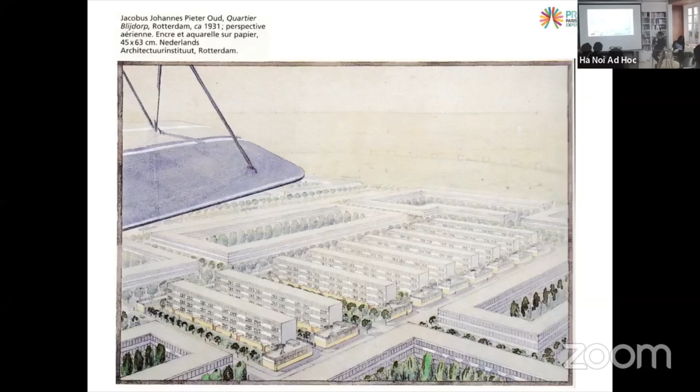I just have two slides to speak about two projects in the 1930s. This one in Paris, in the suburb of Paris, in Drancy, and this one in the Netherlands by J.J.P. Oud, a famous architect in the Netherlands in the beginning of the 20th century. And why these two pictures? Because we can clearly see that these two projects are not the very first ones, but they're very important for mass housing. This one in Paris is the very first one, with Marcel Lods and Eugène Beaudouin, who created this social housing.

But what is interesting is this, and then this. It's also related to modernity. It's not just to make something fun in the picture, but it's because at that time, in 1930, the aircraft is really the symbol of modernity - speed, dynamic, new technology, something very new. So it's not just a picture to present a project, it's not very far from propaganda, showing something in this project.

The next picture is also because the context - the political, cultural, and economic background of mass housing production - is, as I said at the beginning, most of the time because of a housing crisis. Here is a picture of Paris, but it's very true for all French cities, and I think German cities too, that after World War II there was a huge housing crisis. You see this is a very well-known slum in Nanterre, in Saint-Ouen, in the first belt around Paris. So this is what motivated the authorities to think about a mass housing construction program.

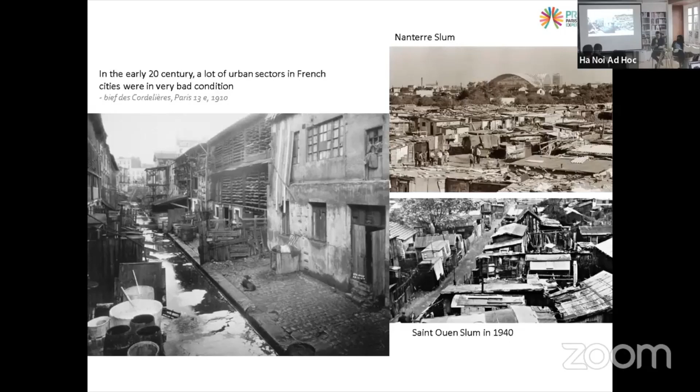And also what's happened right after World War II, it's what we say in France, Trente Glorieuses, 30 years of very high economic development, 1950 to 1970, where there is this kind of program of mass housing construction taking place, because it was also a way to modernize the society.

So here we don't speak about housing, but living. And in fact, it's what people dream at that time: have a car, traveling, have electronic equipment in the house, something like that, to have a modern life. See this advertisement, Moulinex libère la femme - free the woman. So it was really important.

I have a movie, but we don't have time to watch the movie.

And in parallel with this situation, there is also some concepts, a new concept to organize the city. So this one is a bit older, but those concepts was just a theory or a utopia when they thought about this in 1898, for example. After World War II, they became real, they became like an inspiration to develop this kind of program.

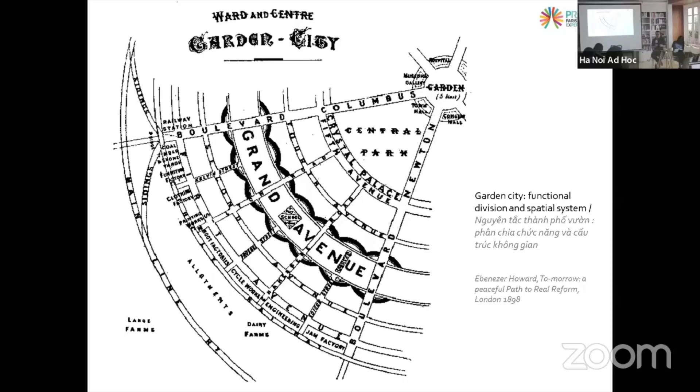What was also very interesting and also fits very well with the Vietnamese example is the company town. And I take this example because I want you to understand that the massive influence from foreign countries is not only from socialism. This kind of reflection, this kind of concept was also developed in other kinds of capitalist countries like Britain or here in the States. So, it's quite old also, 1890.

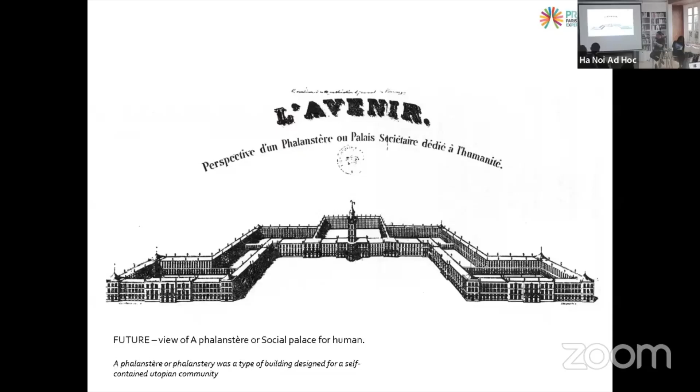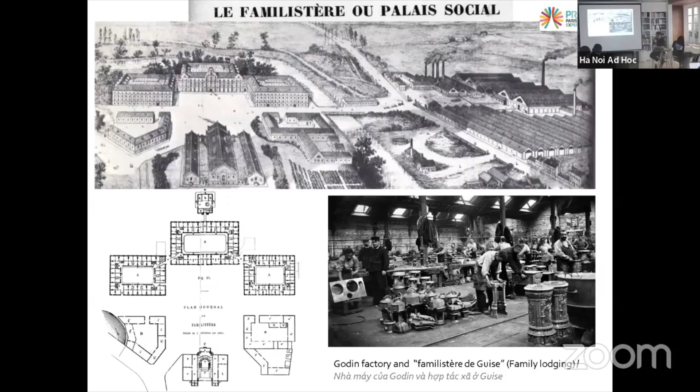And think about - so we see the picture, it's very similar to this utopic picture - think about welcoming all these workers in the same place. There is just a river in between the factory and the housing project. And this is also a very important reflection about how to dwell, how to live together.

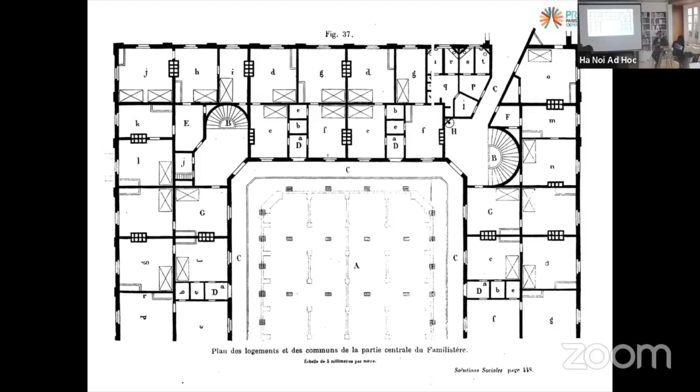So, for example, this is the common courtyard for all the people who live there. And this courtyard was really supporting all the community activities, etc. And it was very true also for all the ground floor. So it means that they shared in this building some nursery, some kitchen, some toilets, bathroom, etc. So it's why it's the very beginning of collective housing.

So here we have some archive pictures of this courtyard with people who live there in the middle, and it's very supportive for community stability and community events, like this one, which could be an official ceremony for a wedding or something linked with national fair activities. So this is a very interesting project because it's one project that really started to think about collective society and living together in one area. This is actually a today picture of this Familistère. Now it still exists, but it became not a housing building anymore, much more a museum.

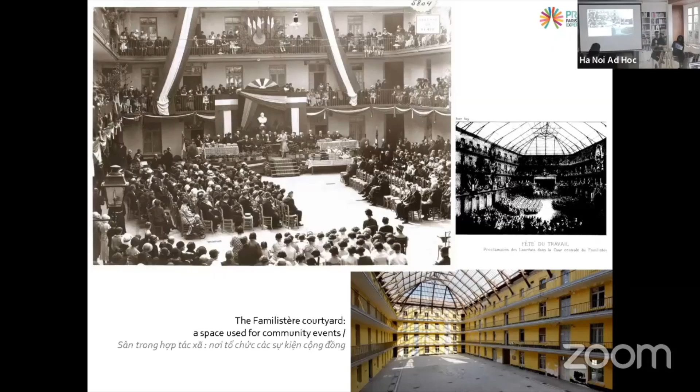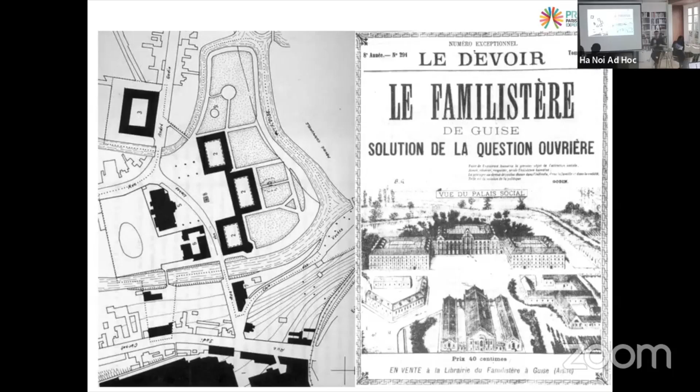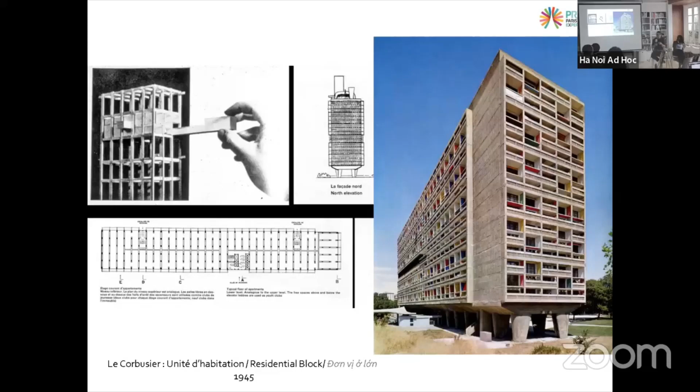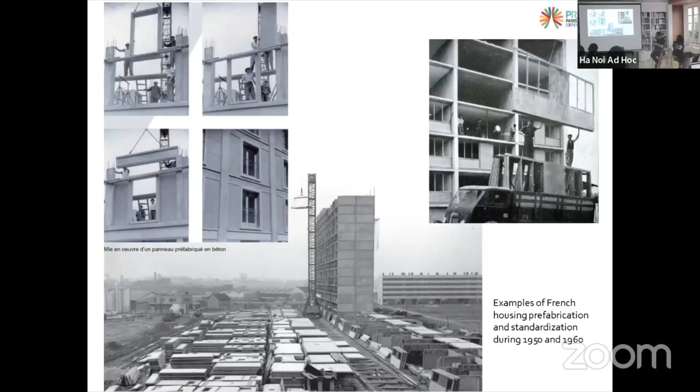So what happened after in Europe? What's important is that after World War II, when there was massive destruction in some cities, they needed to rebuild and make mass housing program construction. So it's the time they started standardization and precast construction for housing, and you have some examples here, also in the suburbs of Paris. You see the small row houses traditionally built for workers, and the new model, where we can see the precast concrete panel construction.

And there's something quite interesting also: they industrialized the construction process, using the crane track. This means that the size of the building is not limited, but is limited by the crane track, which can allow it to be very, very long.

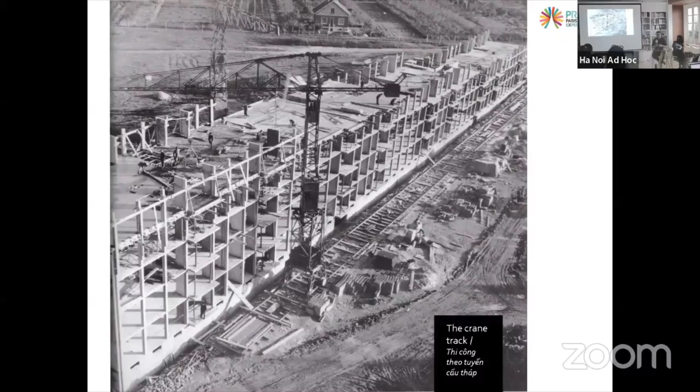You can see, for example, this one in Nancy, France, in a neighborhood called Le Haut-du-Lièvre. At that time, it was the longest building in Europe. And you see that it's not only one building, but several buildings, with a lot of heavy housing and people living there. It was just after World War II.

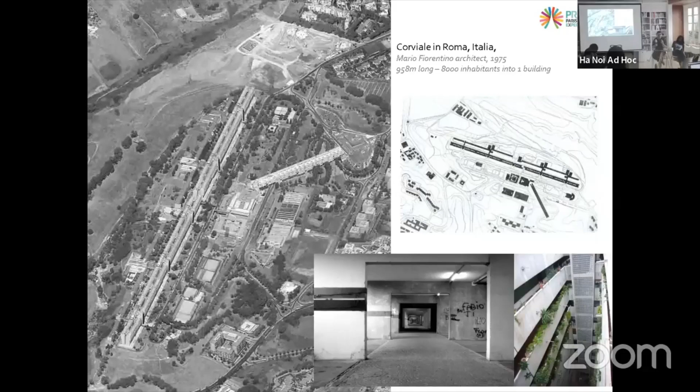And here's another example, a bit younger, from 1975, where the crane track construction method is also very visible. This is the Corviale in Rome, Italy, almost one kilometer long. So these are some experiences in Europe.

There is also some... it's true that in Europe, for example with Le Corbusier, and other mass housing, it was most of the time promoted by socialist governments. But once again, it's not only a socialist view or idea for people. Here's an example in Asia, in Hong Kong. Hong Kong has almost the same cultural background, not the same political background for sure, not the same historical background as Hanoi, but still it's interesting to see that in Hong Kong, after December '53, there was a huge fire in the neighborhood. And then...

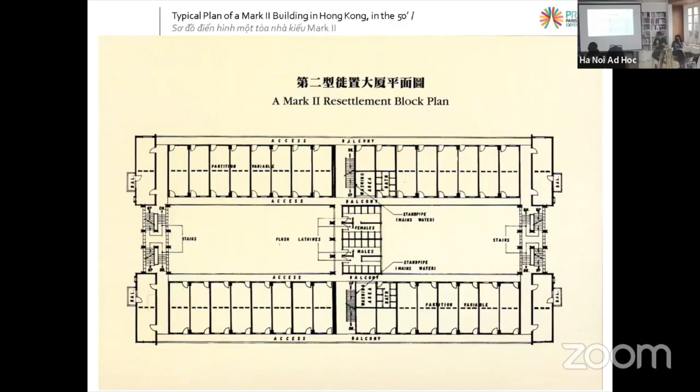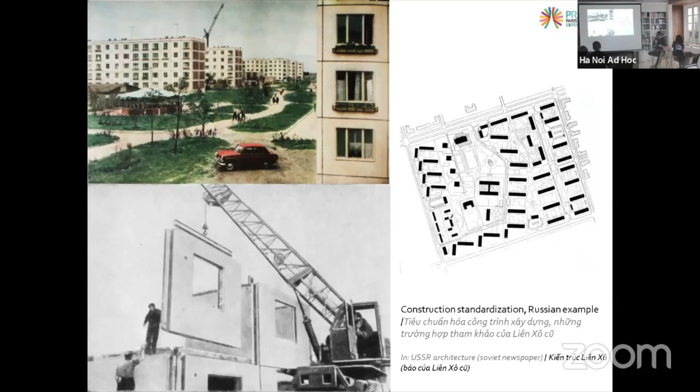Interesting. We see the same technical construction that there is also in France after World War II. The same kind of picture. So it was something very normal at that time to think about precast, prefabrication, etc., concrete precast, etc.

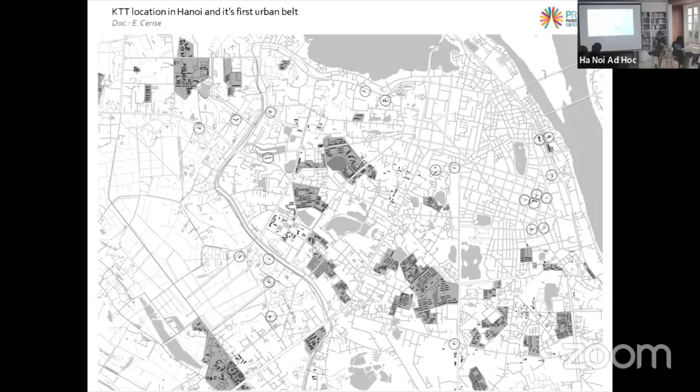So it means that it was also a location to modernize the city. It means that at that time they didn't really care about preserving the heritage city or heritage architecture. This first belt of urbanization was the place to make experimentation, to make a new kind of city, urban living. And it's also what we can see in the propaganda poster at that time.

Here is... you can understand, I'm not sure about the translation, but it is something like build something new, beautiful. And what is interesting in this poster is that there is a crane everywhere, a nice woman who drives the crane. Some industrialization and industrial sites, but this building in the front looks like housing. So it means that housing is also a part of the modernization of Vietnamese society at that time.

So this is another poster, and what is interesting is also what we can see here. We recognize the real socialist parts, but here what is interesting is we can find the crane and the precast concrete elements to build houses. So it means that it's quite an important part of the socialist propaganda.

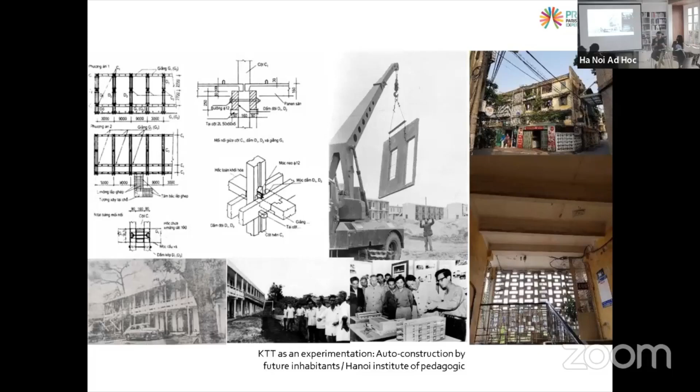And here on those drawings, you can clearly see also in this document, for example, the precast concrete element that is put together to make the building.

So this is some map of the floor. And what is interesting, as I showed for some other socialist country, they start also to use some type or model. So there is different kind of model, TL71 for example, or this one. This one is very interesting because TL means that sometimes the unit is the L shape or T shape, 71 is the year. So they build thousands of units using the design model. So it's really the technical standardization and in fact also the architectural standardization.

And here is also interesting on this model, the TL71. In fact, there is one corridor, the staircase here, one corridor, and two rooms, and a technical part here where there is the kitchen and bathroom. But the two rooms was also divided to allow two families. So it's also really a collective unit.

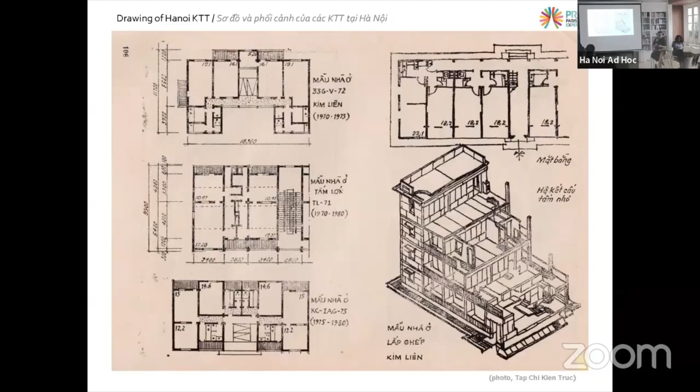And here is one of the first experiences in Hanoi, started in 1958 in Kim Lien, that we will visit later I think. So these buildings, they really use the precast element for each building. And in fact, I don't have a general map of this Kim Lien KTT, but it was influenced by a Chinese way to build mass housing with row buildings, just organized like that. See?

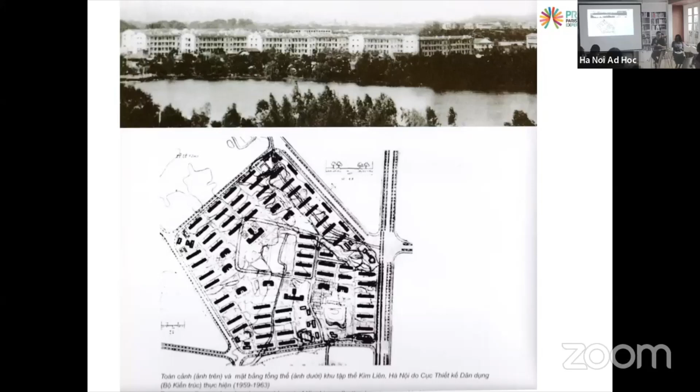It would be different. So it means that for those one, what Roman showed us is the period from 1960 or around 1960. In fact, what happened in Vietnam also after 65, after that there is a conflict between Russia and China, they decide to go closer with the Soviet Union, and they not fully stopped the cooperation with the Chinese, but the Chinese influence became very, very weak.

So that's why they try to develop some other concept. And this other concept is what we call the micro-rayon. Micro-rayon, or neighborhood, is something not firstly developed in the Soviet Union. This is the model from Mr. Clarence Perry in the States. It's not really a micro-rayon, but it's a neighborhood unit, and that worked the same way.

So it means that the housing is developed around a center, and the center is the community center. It could be administrative, it could be a school, something like that. And this is the way to organize the neighborhood. But in the Soviet Union, they developed this model very deeply, and then created this concept of the micro-rayon.

And here is a picture that explains quite well how it works. So you see, in fact, the whole structure is a city, number 4, a town. But it's made by different sectors, and the smallest one is a group of housing for 2,000 residents. And you can see here that there is kindergarten, a small equipment for this scale, and then you add several to make number 2, that is a micro-rayon working with different sectors. And in the middle, you can have some productive activities, schools, etc.

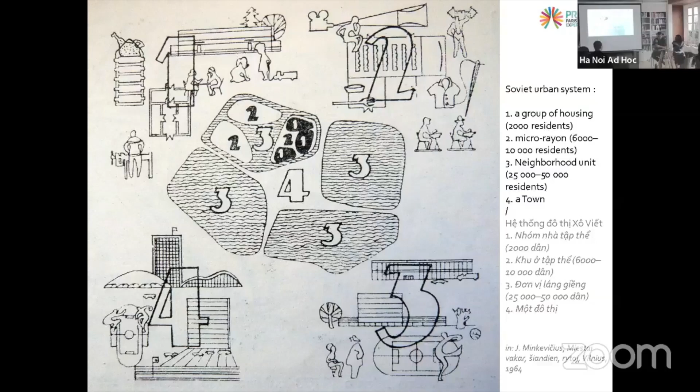And then you had several micro-rayons to make a neighborhood unit. Neighborhood unit is, you see, 25,000 to 50,000 residents. And in the neighborhood unit, you can have bigger social facilities, sport, university, something like that. And then you multiply, you had different neighborhood units to create the town. So this is the principle of the micro-rayon.

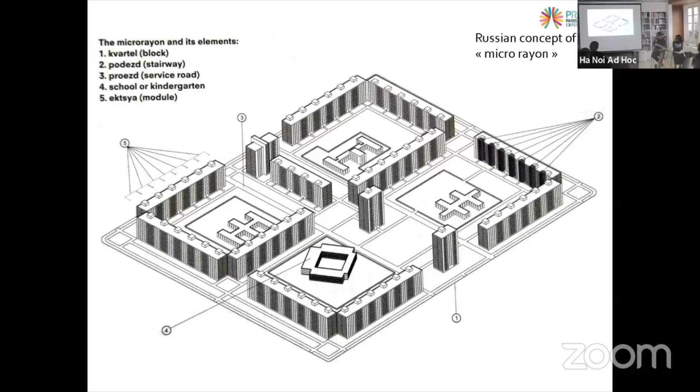So here it's another example of the Russian concept of a microrayon, but it's exactly the same. So it means that there could be a school, a kindergarten, a sport facility in the central part, and then house around. And then you develop this in a neighborhood.

And here, so it's the difference between the Soviet concept with the small microrayon everywhere, and then the Chinese concept that is less working like a rayon, but with housing to be like this one: housing, facilities, housing.

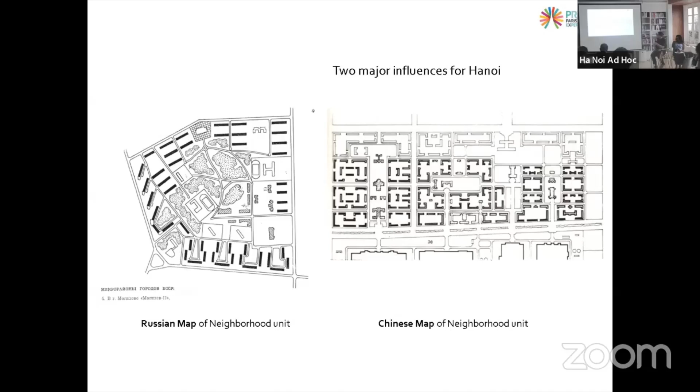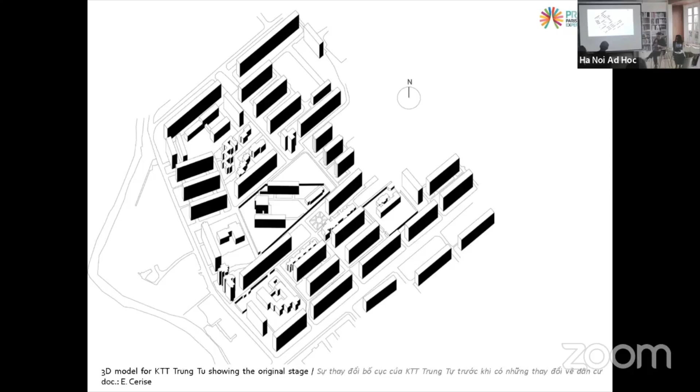So in Vietnam, they work quite, for several KTT, they use this microrayon concept, like in Trung Tu, where it's quite clear that there is the facility, a big facility as a school, kindergarten, a big school in the center, and then around housing.

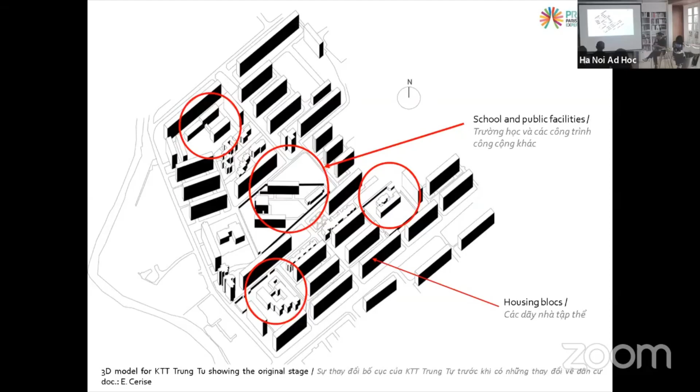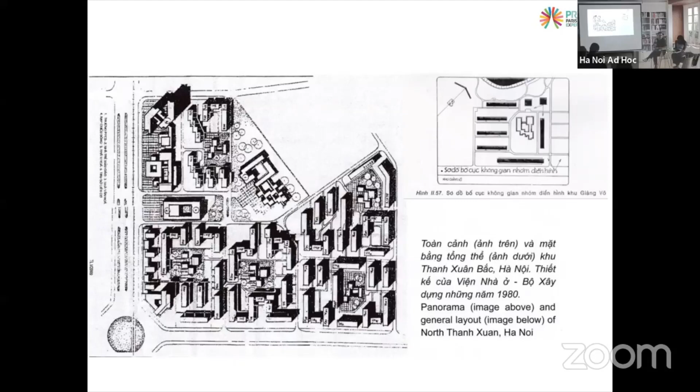Here you see the social facility in the center, and then housing around, and then something bigger in the middle of the composition. Here is the same KTT in Thanh Xuan Bac in the 80s, and you can see also the architecture that's very modern, for example for the school, for the housing. So it means that once again, the modernity of the KTT is about architecture, construction, and also the society. The way they built this KTT was a way to modernize the Vietnamese society.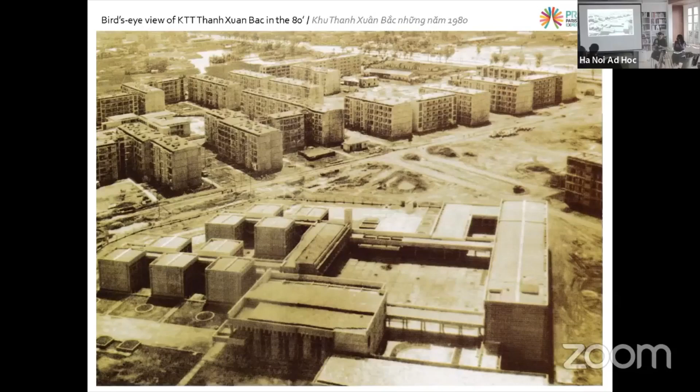Now let's discuss quickly the transformation of those KTT. Here is some pictures. One factor of the transformation comes from the vegetation. Here you can see some archive pictures of KTT Kim Lien and KTT Thanh Xuan, this one from 1960, 1980. You see that the use of vegetation is like green space, so very informal and only functionalist purpose for the green space.

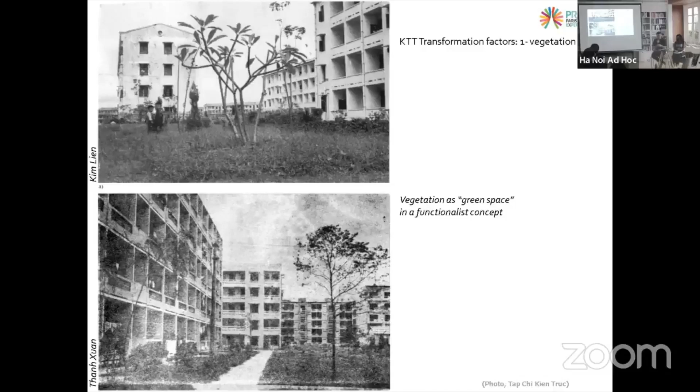And here is a picture now, actual. It's Giang Vo, another KTT, built in 1976. But what is interesting is that the vegetation moved from the floor to the facade. So it means that now it's not anymore a garden, buildings in the garden or in a green space, but it's more a green building in an urban area. And you see that most of the time the greenery comes in some place with additions, like the tiger cage.

And what is interesting also in this tiger cage is what there is inside. For sure, most of the time it's to have more square meters, the people who live there need more space, but not only to have more space. This picture is quite old, 2000, but they start also to have some different kind of function. For example, here it looks like a rural house courtyard, very small for sure, but there is a bird, there is some vegetation they use to make shadow, or they use for the kitchen. You even change your shoes when you go out, exactly as in a rural house.

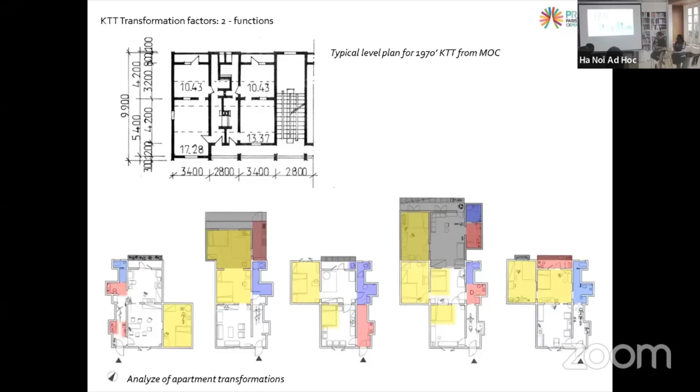What's interesting also is that the kitchen and bathroom most of the time move outside. For example, here the kitchen was planned to be inside this small area, and it's very narrow, very small, and not well ventilated. Most of the time the people use coal fire cookers, so it's much better to do it outside. So one of the first things they did was put the kitchen outside. The kitchen moved, in this case, from the inside entrance, to the balcony, and sometimes, as here, to the public space.

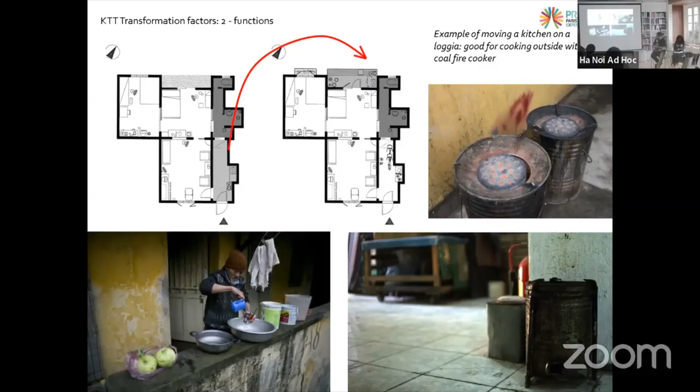Another important factor of transformation is the commercial activity. In the socialist time, the KTT was designed only for housing, since no private business was allowed. But in 1992, when the government allowed private business, it was a very important step of changes in the KTT.

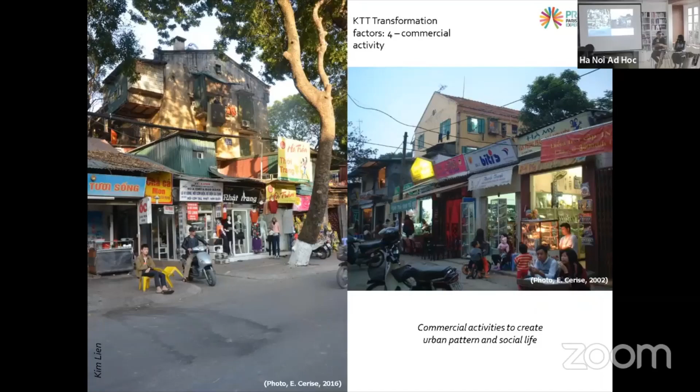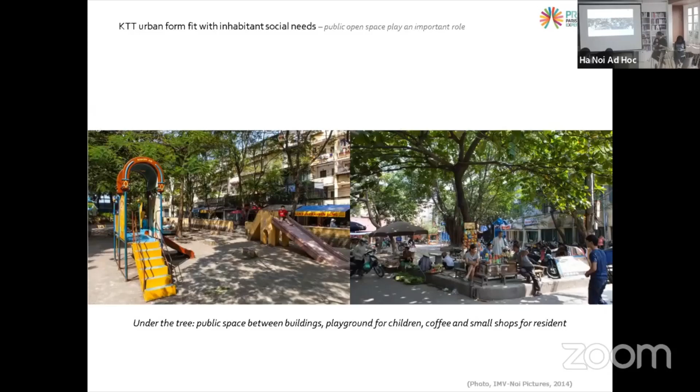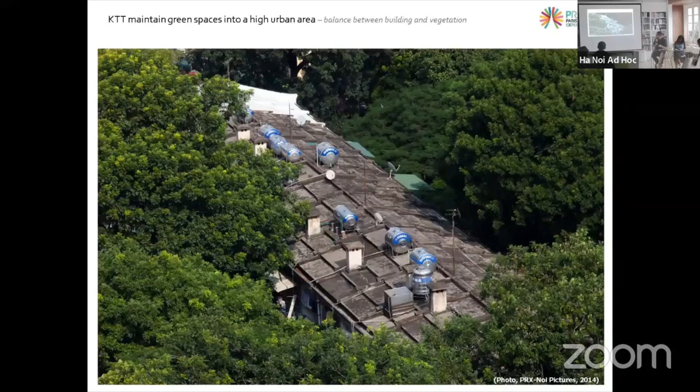Just a nice picture to see that the KTT is like a building in the forest. It's interesting because there is a huge contrast between the new buildings and the KTT. Here it's very easy to see: the KTT buildings look really like a building in the forest, and the new building looks quite different. In this picture, it's the same.

So now the KTT looks like something that can create a balance in the city between a high dense area and a low dense area. The KTT now is quite low density compared to other urban sectors.

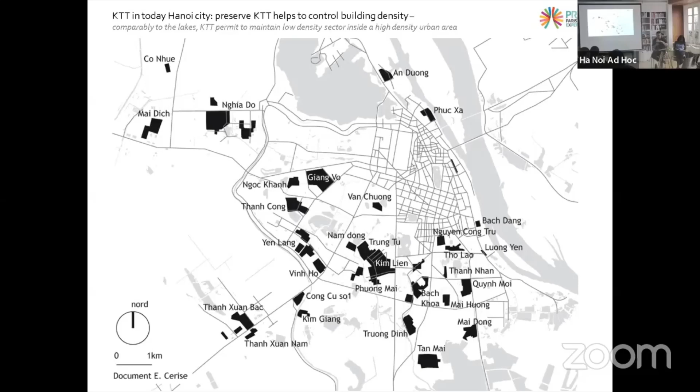So maybe it's a bit clearer here - you see the lakes in the city and the KTT. They can play the same role to make a balance in the city, to have low dense open space, also in contrast with new development. This could be an important factor for our argument - that it's interesting to work on that side, but also to preserve this quality of good balance between trees, vegetation, buildings, open space, and real estate.

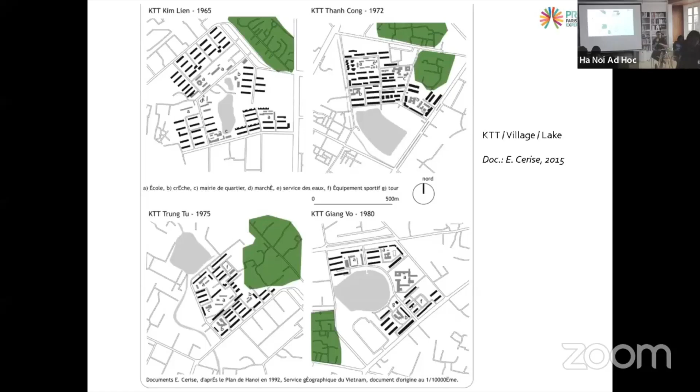Here also, in 4 different sites, you can clearly see that there is each time a village, which is most of the time the original name of the KTT - Kim Lien. At the origin there's this village, but the KTT Kim Lien and the lake Kim Lien, and it's the same for Giang Vo, for Trung Tu. So most of the time, there is really a balance between the former village, the lake, and the KTT.

Now, quickly, just an example of the destruction of the KTT and some projects. There are projects in each KTT that most of the time involve destruction to rebuild higher.

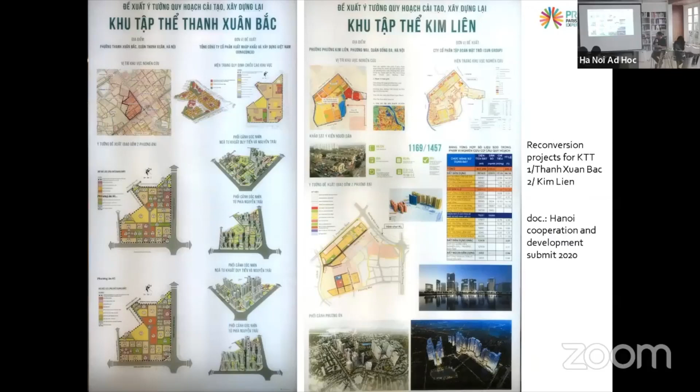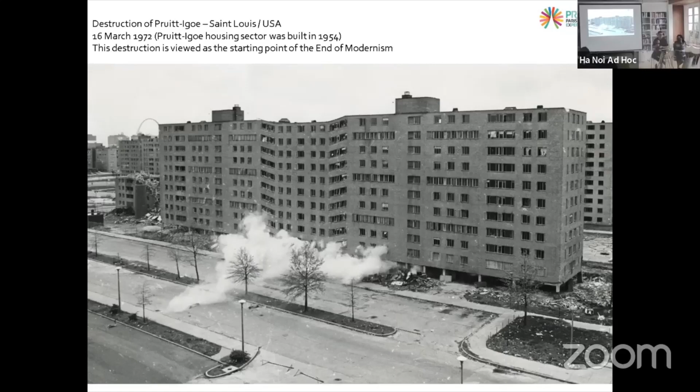Now, just to conclude, I would like to show some examples of what's happened to mass housing buildings around the world. This is an important event in 1972: the destruction of Pruitt-Igoe in Saint Louis in the States. This was, in fact, the first time that we destroyed this kind of housing.

So it's happened in Hanoi too, but sometimes they decide to destroy the KTT. This destruction was like a symbol of the end of modernist architecture, because it was the first time that we destroyed modernist architecture. It's quite interesting because in 1972 we still built here, KTT, but in the States it was already being destroyed.

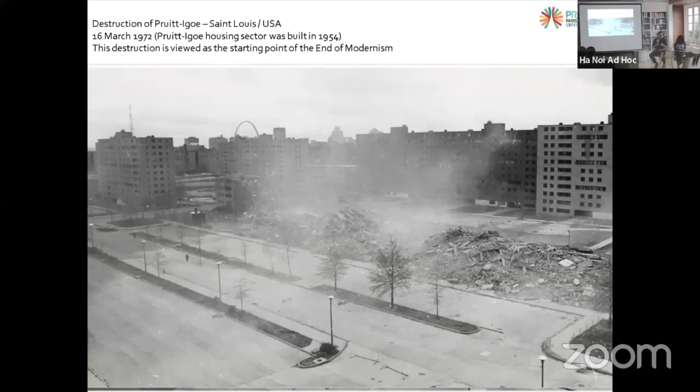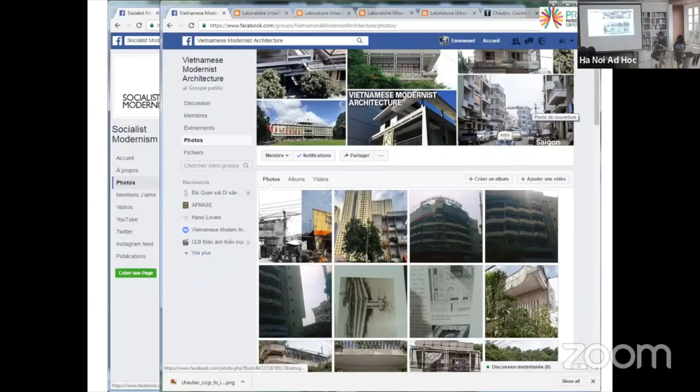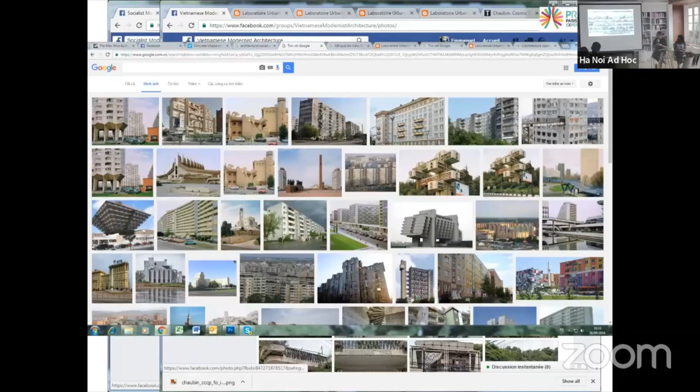Most of the literature and stories are in French, but there is now a lot of literature about post-war reconstruction, brutalism, urban renewal, and many researchers are interested in what happened with socialist architecture and buildings. It's the same if you look at Google or Facebook. Even in Vietnam there is interest, with Vietnamese modernist architecture appearing in Google searches too. Socialist brutalist architecture is now interesting for people, not only for research.

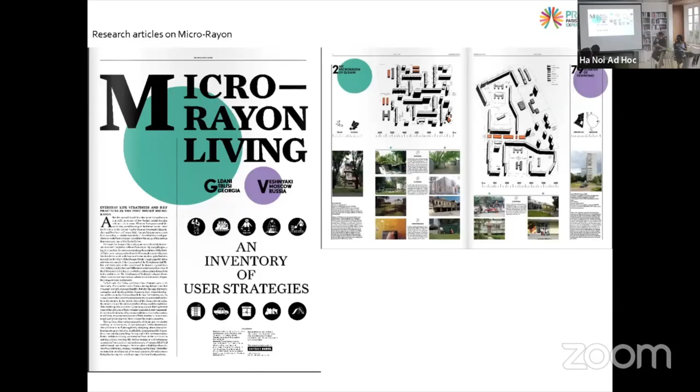There are also researchers, and in this example we clearly see work on the Micro-Rayon living. So there is a lot of interest in that kind of architecture.

This kind of architecture also became like a heritage. In France, for example, La Ville, Le Havre, a city near the sea rebuilt after World War II, is now classified as World Heritage by UNESCO. It's one of the first times there is clear recognition of modern architecture by UNESCO.

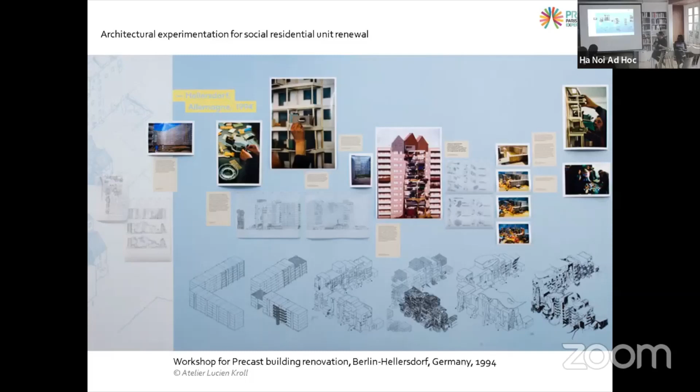Some architects also pay great interest in that kind of housing, such as Lucien Kroll, with a lot of interesting workshops. For example, this one in Germany, in Berlin, organized workshops with the inhabitants to make a new design or to repurpose some buildings. It's not exactly the same, but it's from the same period of social housing, and as you can see it's a bit bigger, but it's very interesting to see what is possible.

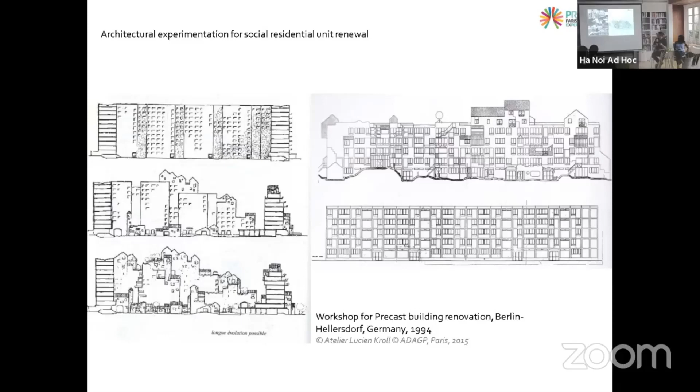It's not only about what's happened, but really about developing other kinds of projects, and Lucien Kroll did it very well working with inhabitants. Other examples from his atelier include a workshop in Belgium, Netherlands, and a very last one in France, in Bordeaux, developed by Lacaton et Vassal, a very famous architect in France.

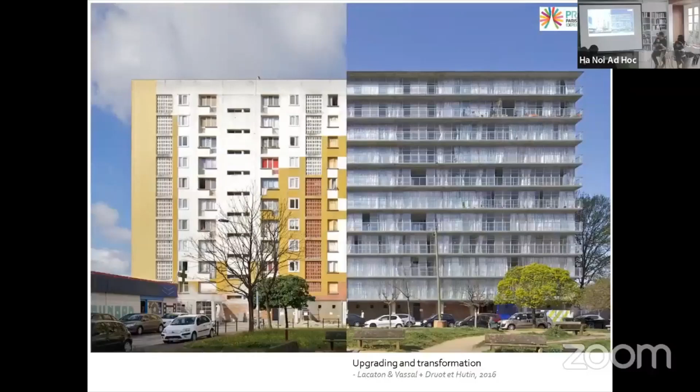What's interesting is comparing the original building with the extension made to modernize it. Here we see the KTT is a bit higher also, this is the original design, and then the actual design, where everything becomes glass and very transparent. Before and now, and this raises a question to start a workshop on the future of the KTT.

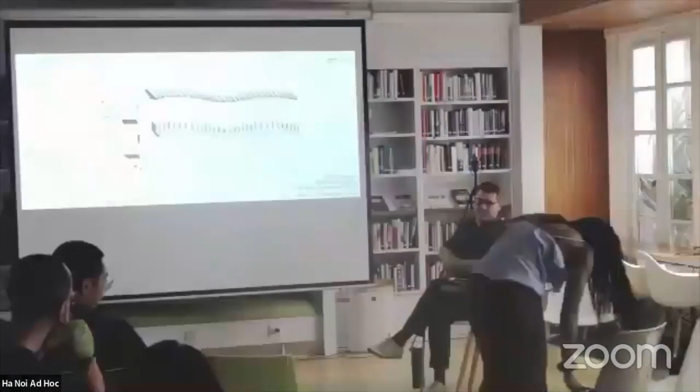As you said, some buildings are taller than the traditional KTT in Hanoi, maybe 10 plus floors, and are much more similar, in my opinion, to some old apartment buildings that exist in Vietnam, some relocation buildings used to clean up some areas and redevelop, for the same purpose of modernizing. So I'm wondering if it's worth making a distinction between those buildings that exist in Vietnam, maybe 10 floors, and the KTT. What are the characteristics of KTT that are specific, the exclusive properties of KTT? How can I differentiate KTT from other old apartment buildings in Vietnam?

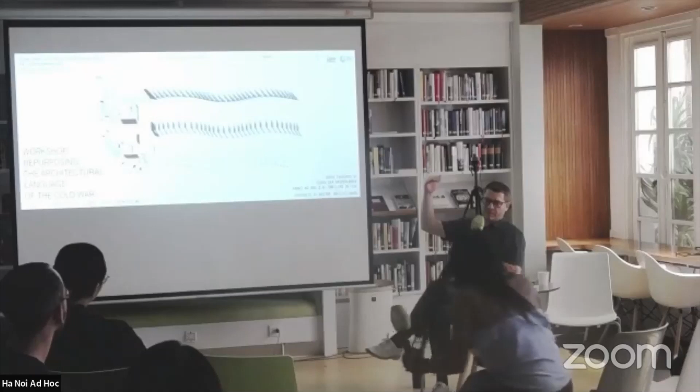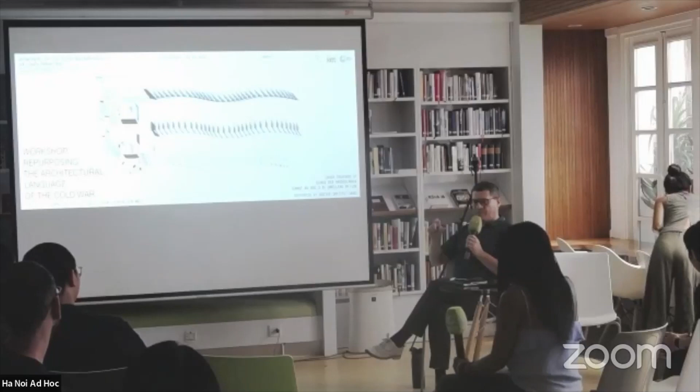I don't know if you're speaking about the Khu Do Thi Moi, which is the newest type of building. I think the first projects of Khu Do Thi Moi started to develop around 2000, and at that time they also followed some patterns like the KTT, meaning we can find projects with a belt of housing, and inside some facilities and meeting spaces, but also individual housing. That wasn't very far off, but very quickly they changed, because the influence came from somewhere else, more from other developed Asian countries like Japan, Korea, South Korea, or even China, and another story, the multiplex from Korea. So even the distribution inside each unit is very different, not coming from the modernism cultural background, but from another culture of living. For sure it looks very different, so I prefer not to emphasize the rupture between the stages. I think there's a kind of continuity, but in the end, the Khu Do Thi Moi model is very different from the history of the country.

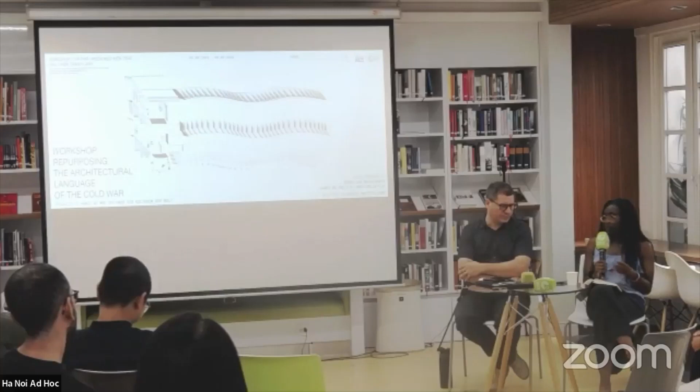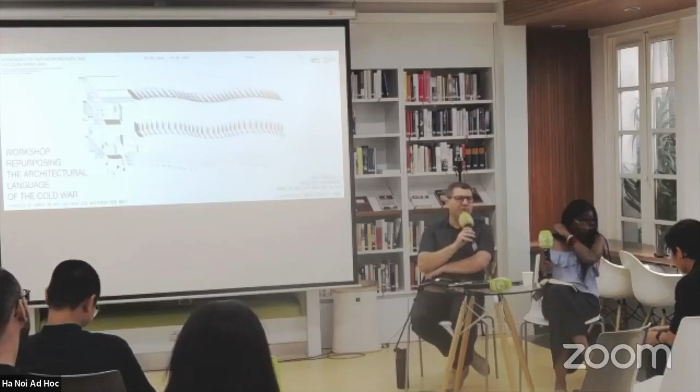Most of them worked more on public buildings than on housing. After that, with the Russians, there was also a huge cooperation with the Institute of Urban Planning in Leningrad. They had an office here and worked in Hanoi to make the master plan and develop some projects. So there is some cooperation, some influence, but both work at the same time.

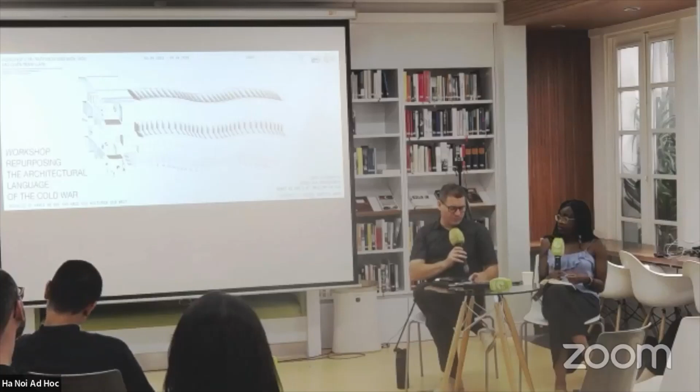What do you think? Because it's mass housing and design for many people, it cannot really take individual needs into consideration. These housings were built for the working class, and maybe technology wasn't adequate. In fact, most of the housing was built by the Institute of Housing or by public companies. They built houses just to house the workers, or for the army, for example.

It's always public, for sure, always a public office. The design of the house, of each apartment, is also based on a modern life, in a modern way. They had some ratio for each family, how many square meters they were allowed to have.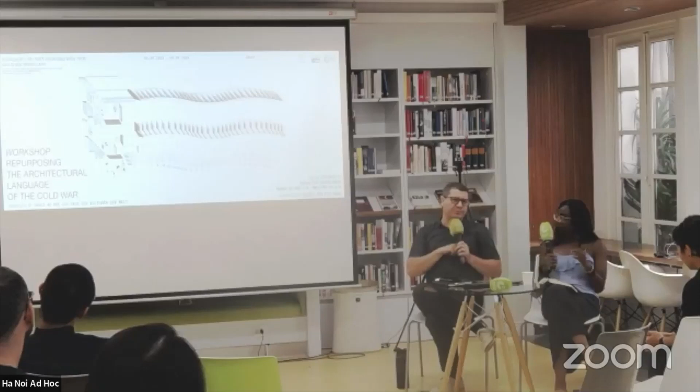My question is whether this housing design didn't have a Vietnamese touch, even though in the housing design, I don't recognize Vietnamese social housing. I'm not sure. What I think is there is some adaptation for the tropical country, but for Vietnamese culture, maybe we'll discuss that tomorrow. Because I could imagine that the transformation happens in the characteristics. Transformation, for sure.

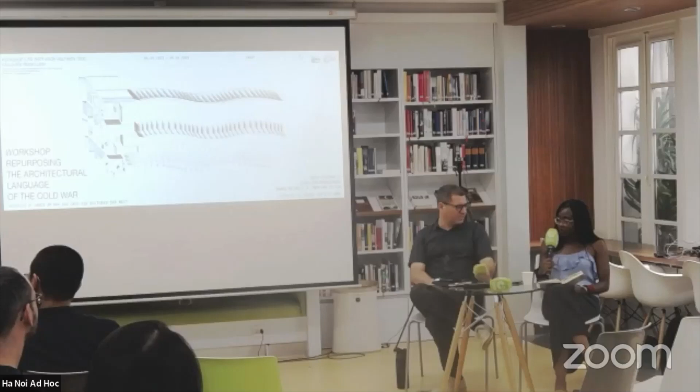I'm also interested, when you started with the background, giving this French example, the housing and the sharing was at the center, but these families were also get hurt. I wonder if the people really wanted to share, not to answer that, but who initiates it? Like the company town, the families there, those kind of projects were initiated by the industrial boss, from the company.

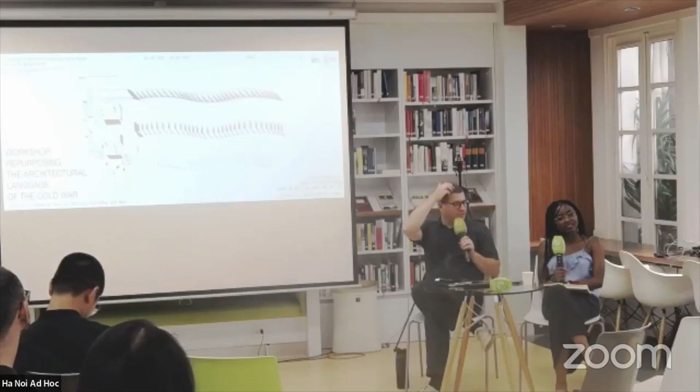It's a social movement they call paternalism. Paternalism, where the boss is like the father of the family. So that was the concept.

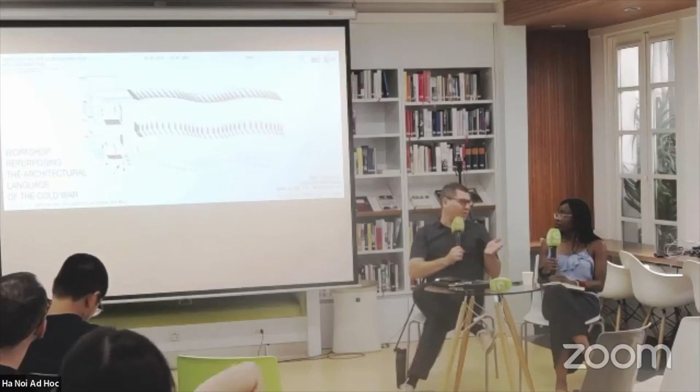It was rice field, meaning they don't really touch or destroy the village, but the village remains. Most of the time I show a map with a lake, okay, village, and the KTT. Most of the time, the lake doesn't exist like that. So they build the lake to drain the land and to build on the rice field, but they don't destroy any village.

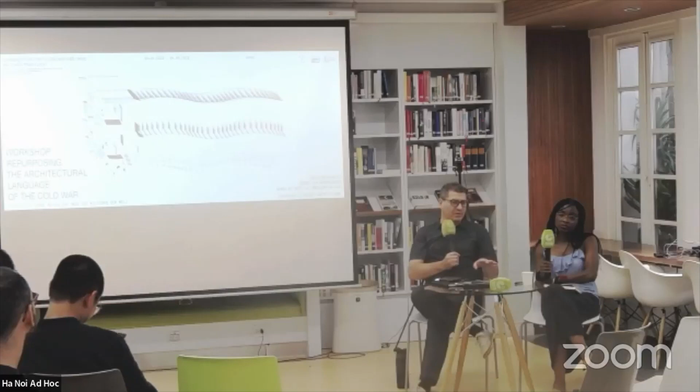There is a master plan. No, no. And I think that at that time, all the land was owned by the state, and they just permitted people to work it. So it was very easy to dispose of, to use the land, to change the purpose of the land. Now it's a very tough question how to move rural land into urban land, but at that time it wasn't.

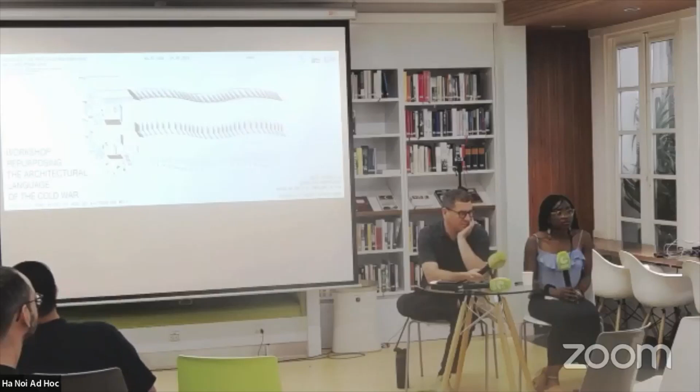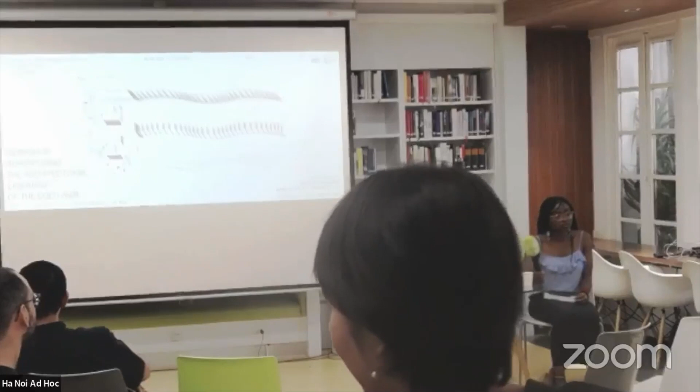I haven't made any research on that. I mean, in history, I know there is some research work on that topic now, because it's a huge question, and the process is also faster than during the socialist time. It's even more violent for the people now because it's very fast, and they just lose the job, lose the land, lose everything just to have some money. So there is some research on what's happening now, but for that time, I don't really know.